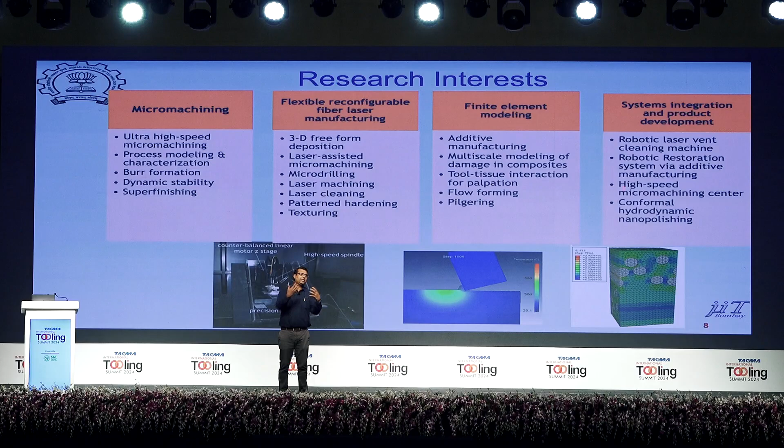So we work on typical industrial problems. We have made machines for CEAT, which have been deployed in their Halol plant. And also we are developing systems which will be deployed. These are special purpose machines. We do both ways. Some things we work on in the lab, and a lot of times we take the unmet needs of industry, work on them, develop a product in the process, and basically give it back to them.

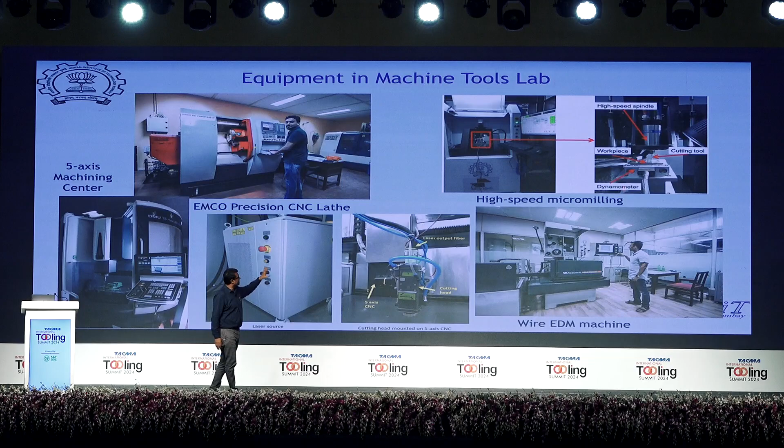And these are some snapshots of the lab. We have a 5-axis machine, we have a hard turning center, we have laser cutting machines, deep hole laser drilling machines, micro machining centers, electrical discharge machining centers. And we have one of the best characterization facilities in the country.

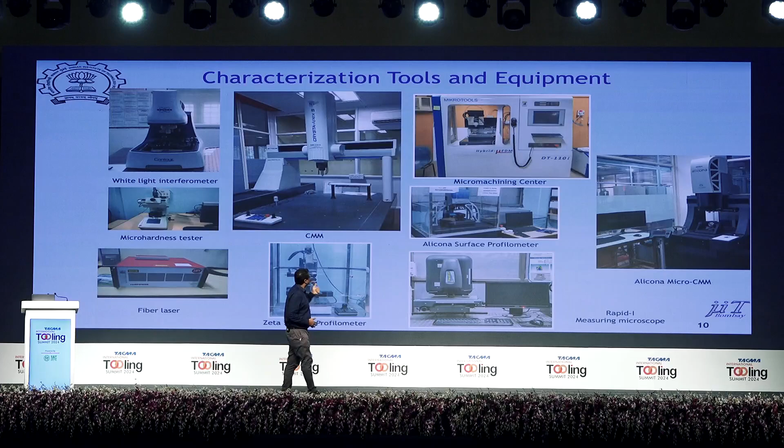We have a CMM that was donated by Mitutoyo, they gave it to us for free. And then we have systems which are automated, basically optical CMMs, surface measurement devices, and we have the best form and surface measurement facility in the country.

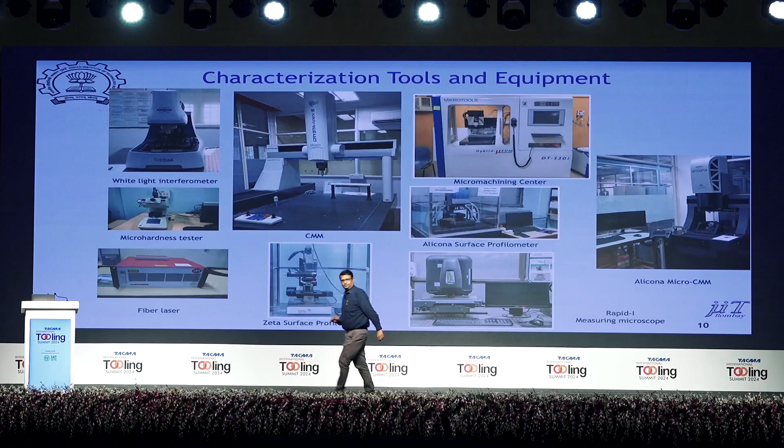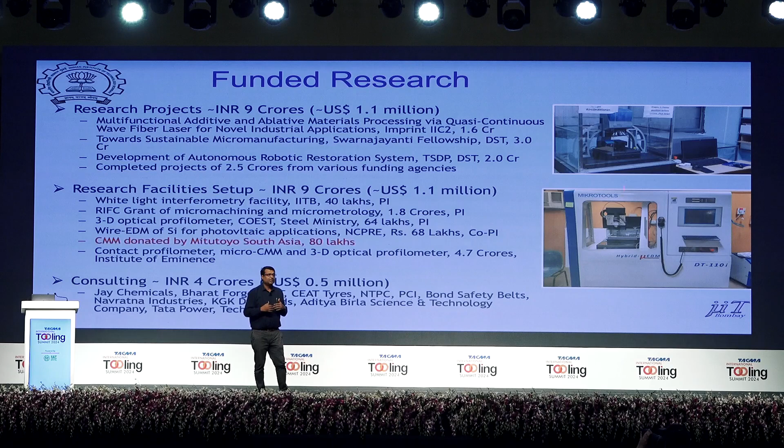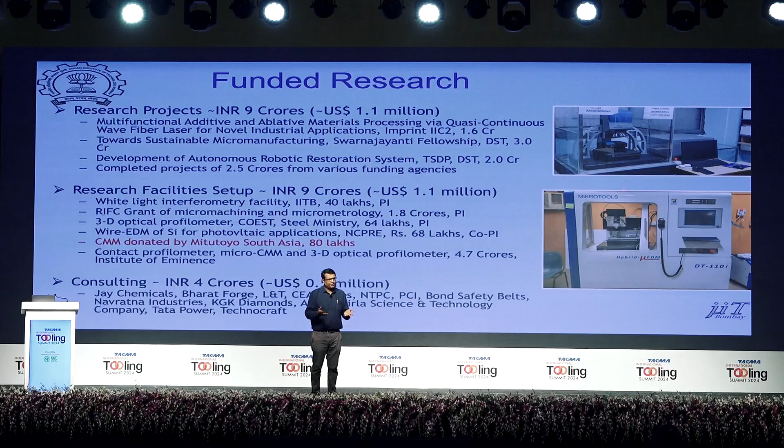And also, in my case, about 50% of my lab funding comes from industry. So we work with various companies. We have worked with L&T, we have worked with Bharat Forge very closely, Aditya Birla Science and Technology, a lot of MSMEs. Jay Chemicals is a company I'm working with, Technocraft. So a lot of these companies we work with, and basically we give them solutions. So a lot of the work we do is not just intellectual stimulation, but also hardcore technology development.

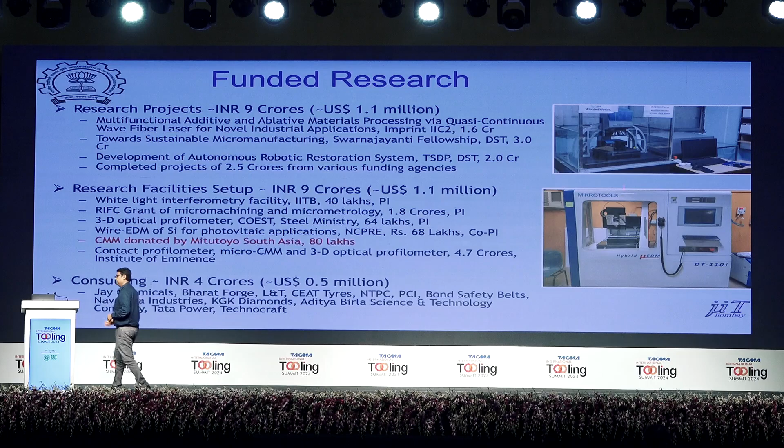So this is a long list, I'm not going to go through it, but then there were some issues. People were talking about polishing, right? Polishers are going away. So there are technology solutions for that.

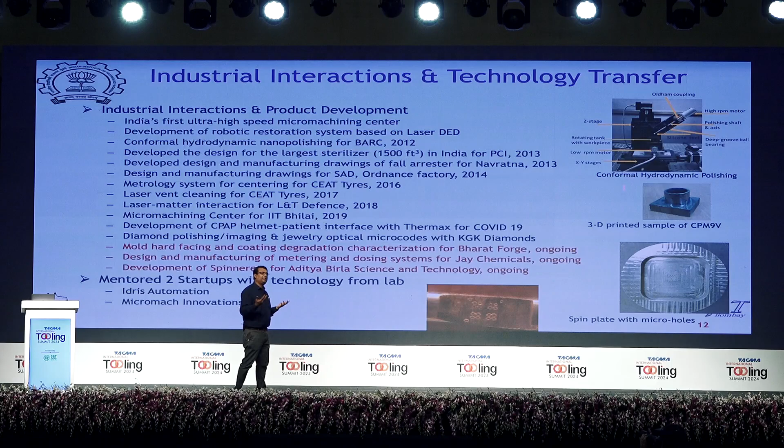So for the first thing, what I did was we developed a conformal hydrodynamic polishing process that was basically for BARC for a very strategic application. We made a machine to polish sapphire. We make a machine, and this can actually be done on a CNC, so you can do freeform polishing also. There are technologies called elastic emission machining, hydrodynamic nanopolishing, which can actually reduce your dependence on human polishers.

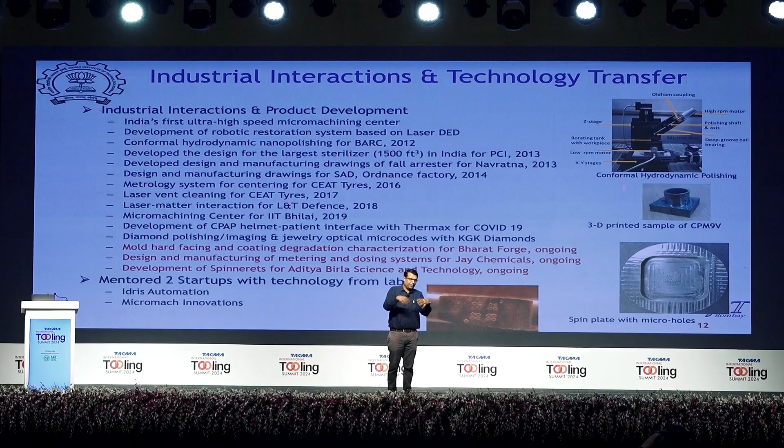So there are technology solutions for things which human beings aren't able to do. The other thing we did was, right now I'm working very closely with Bharat Forge, basically trying to look at their coating degradation or enhancement of coating, and also doing something like mold hard facing and repair.

And then we are doing something for spinneret development. These spinnerets are a whole bunch of holes, which are 200 micron holes, 3 mm deep. So that's the depth, that's the hole aspect ratio. We are basically creating machines, and developing the machines and the process for doing this.

In one spinneret, if you see in the bottom right, these are 20 holes. But an actual spinneret in industry would have 55,000 such holes. So you need to be able to create machines to make such precise holes in large numbers at an affordable price.

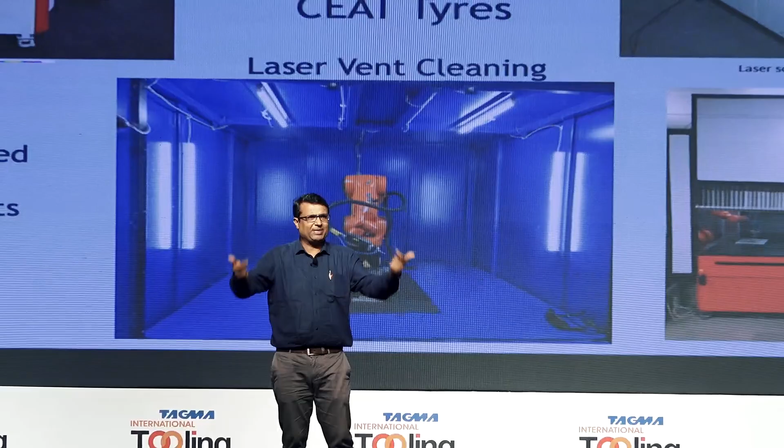And these are some of the machines which we have developed. We actually developed one machine for tire metrology. The problem was that when Ceat was building tires, their edges were not aligning, and they were not able to measure it accurately. So we developed a system with 2 cameras, did image processing, and gave it to their QA QC team's quality software, so it would say whether it meets the quality requirement or not. That complete system integration and building, we did for them.

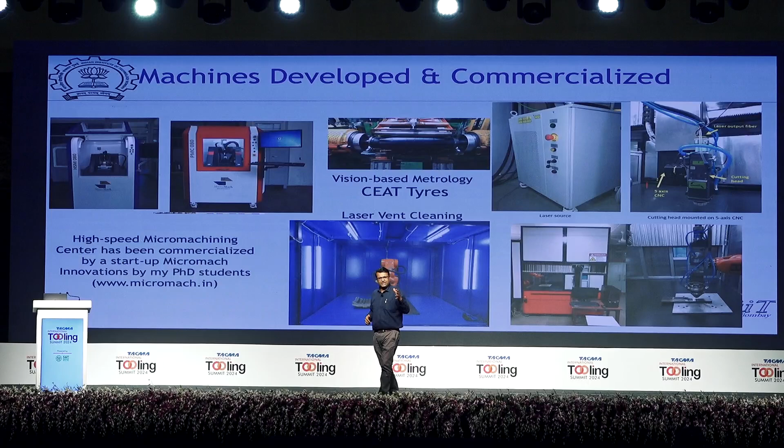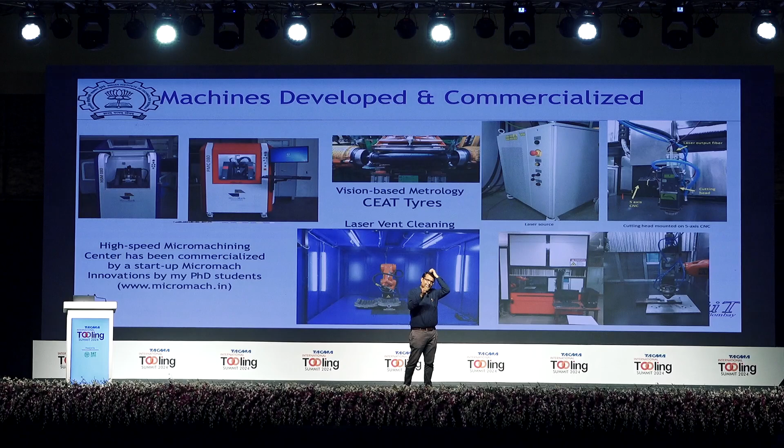Then the other thing we did was something called laser vent cleaning. All of us know these tires have vent spews, the hair-like structures you see on new tires, which come from the vent. When you mold the tire and do the curing operation, after a certain number of cycles the vent gets clogged. What they usually do is use a small drill, about 6 micron, to clean the holes. The problem is this drill can break, and then it can either clog the hole or go into the rubber of the tire. Both are very dangerous. If there's an imperfection or defect in the tire, it can explode.

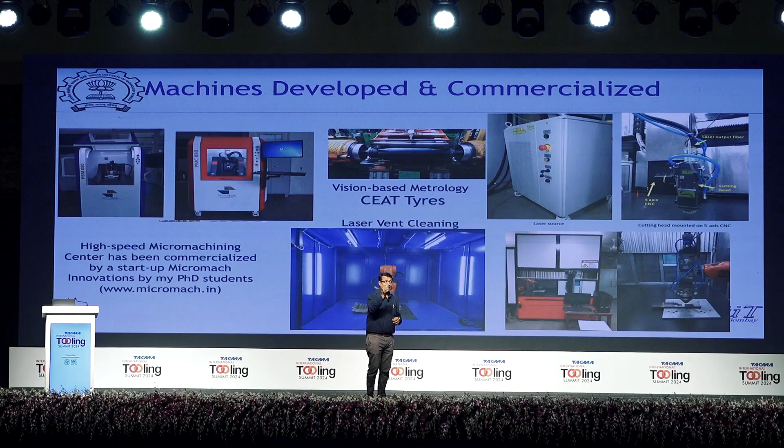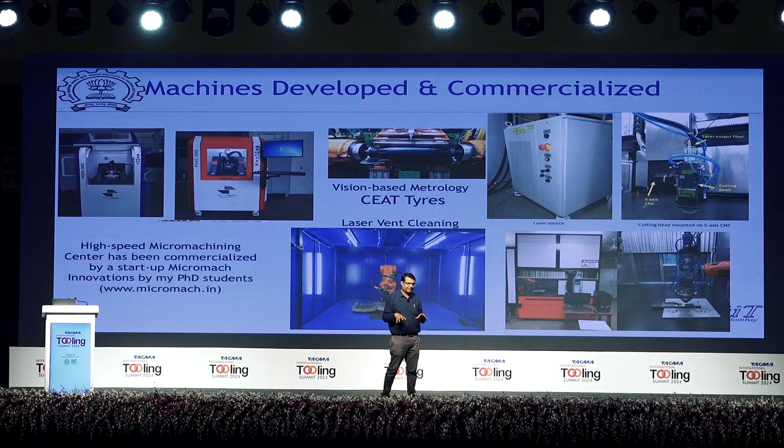These days these are tubeless tires, so they said they don't want any mechanical or manual drilling. So what we did was build a system with a vision system that finds where the hole is, fires a nanosecond pulse laser multiple times, and then blows away all the debris. Completely automated - we said we'd automate the whole process, you don't have to worry about it. The machine won't take any restroom breaks, so you can have a very precise process. We actually installed it - I went personally and installed this machine there.

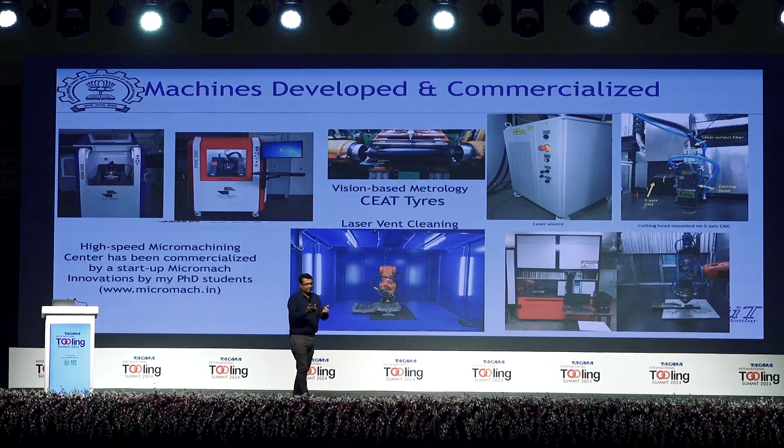And then we also built this micro machining center, which we talked about. For this we started a company. My PhD students have a company that markets the machine and the process, and we also provide both fabrication services and the machines to various people. We actually export some of these things as well - it's my students' company.

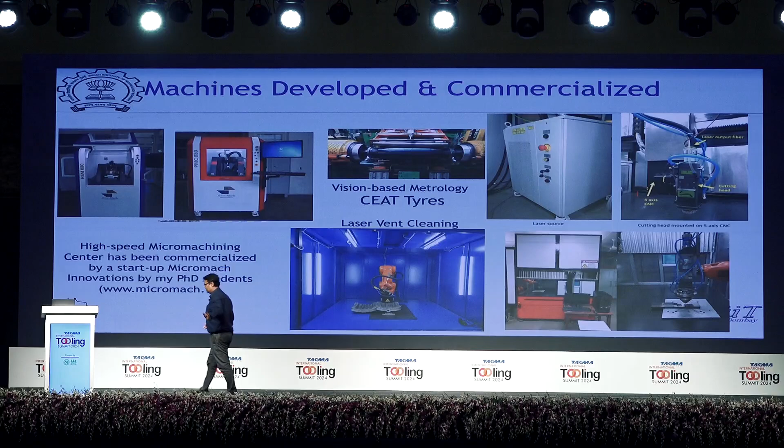Now, all this was just the introduction to what we do. Finally, what I'm talking about is a single project, an industry, academia, government collaborative development of this robotic restoration system which I'll talk about now.

So basically I'm preaching to the choir here, everybody knows this. Aerospace components, dies, molds, boiler tubes are all subjected to thermomechanical loading, and these are very high value items - I don't need to tell you that, you guys know much more than I do. For existing damage repair, when your mold is expensive and gets damaged, what do you do? You gouge out the material, fill it with a welding electrode, polish it, and say it's good as new. But the problem is it's a very ad hoc and imprecise way of repairing it, because you don't know what kind of residual stresses are coming. If the residual stresses are tensile, it will not last even 4 or 5 cycles. So if you understand it scientifically, the key challenge is how to do completely automated restoration.

So say if a defective die comes to me and I want to repair it, what would I do? I would need to create a system where it can scan the defect, deposit the material, finish it, and inspect it. Complete autonomous, no human intervention there.

So if I were to do that, there would be two challenges. The first challenge is creation of such a system. It would need a manipulation device, a deposition device, a scanning device to find the defects, and finally an inspection device. So one component is just developing the physical system.

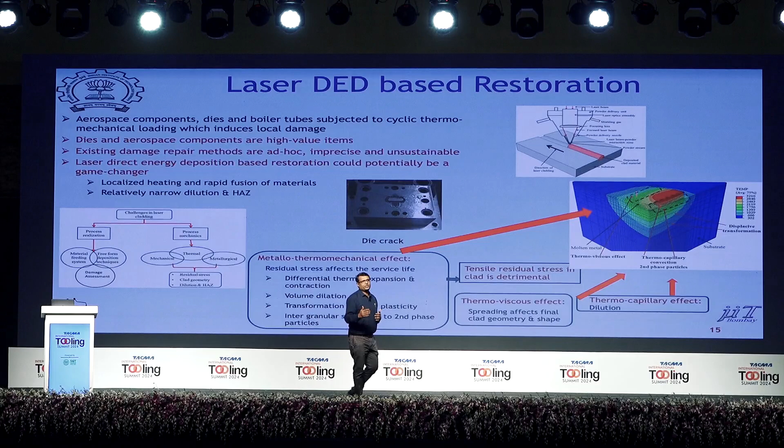So you need to understand the science. One important thing I always talk about is whatever technology you develop, if it's not science enabled, it will not be sustainable. That's what I talk about in all the forums, every place - technology has to be science enabled.

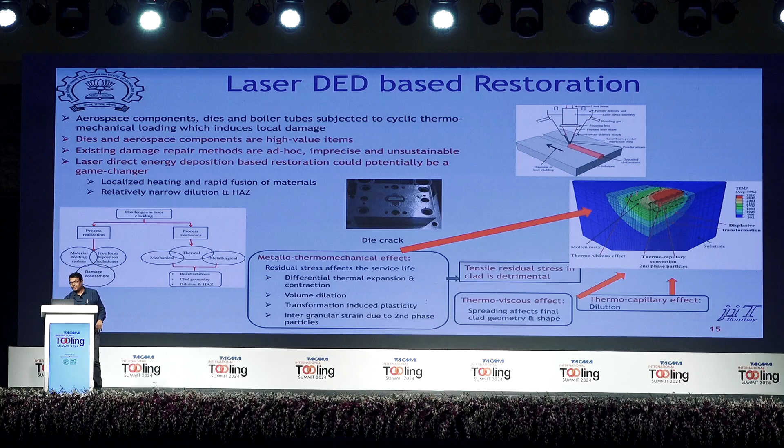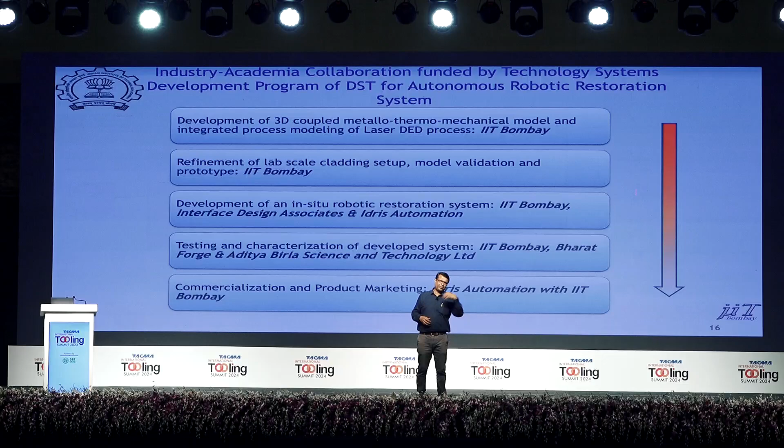So these are the work packages. What we did was first develop all the scientific understanding, which may not mean much to you, but I'll give you some gist of why this is important. Then we made a lab scale setup. Based on that, we went to the government and said give us money because we can show you a proof of concept, but a real system actually requires a lot of money. So then there's development of a complete system, testing and characterization, and finally commercialization and product marketing.

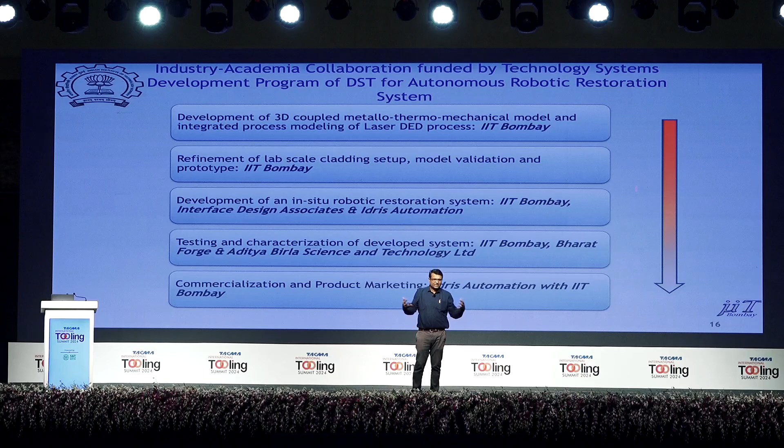So we had players for all these - some of them SMEs, some big players, but the idea was everybody would come together and develop a product.

What we do is capture the strains due to volume dilation, because when phase transformation takes place, if you cool it very fast, it goes from FCC to BCT, and there's physical growth in the volume, creating strains. If you don't account for that, you won't know what kind of residual stress will be there. And if your residual stress is tensile, a small crack will propagate. So if you understand that fully, you'll have much better quality of deposition. That's the moral of the story here.

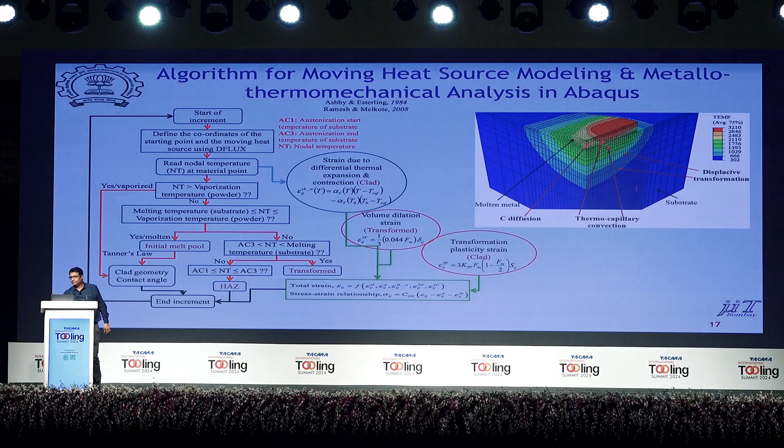So we developed this model and did the testing. We went to neutron diffraction, which is a really fancy technique, measured the bulk residual stresses, and then finally calibrated the model.

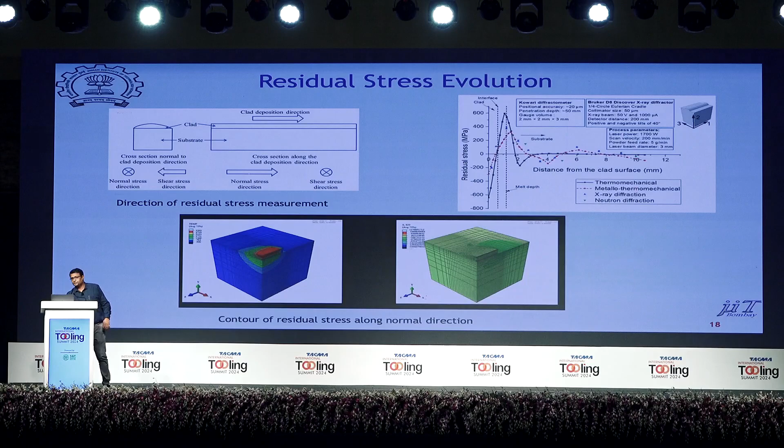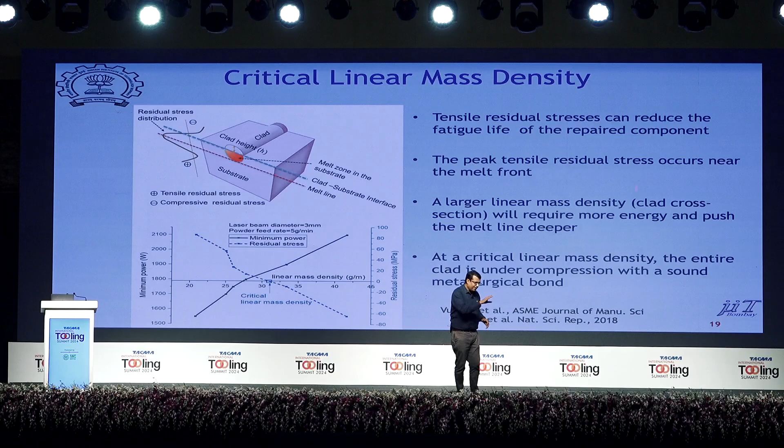With all this, our goal was to define something called critical linear mass density. So we can deposit certain material - it happens that the maximum tensile stress lies at the melt line. You can push the melt interface low, and because of force balance, the top layer will be compressive. So if your deposition is compressive, you don't have to do a secondary treatment - no heat treatment, no shock peening to have compressive stresses.

So this is what we got from this model - just by virtue of deposition, you'll have compressive stresses, so you don't have to do secondary treatment, no heat treatment, no shock peening required.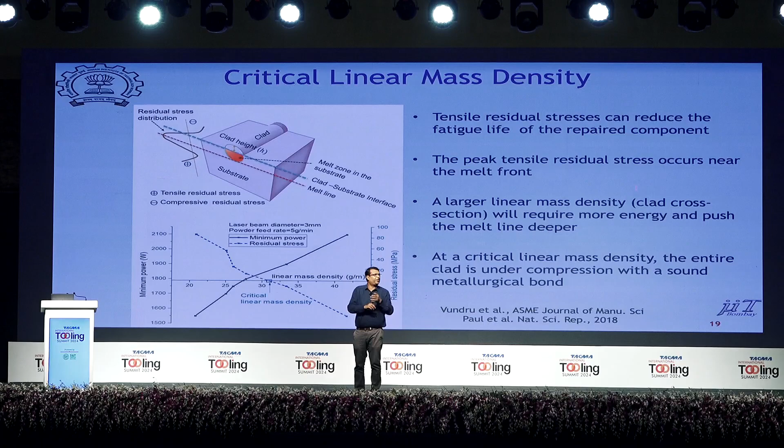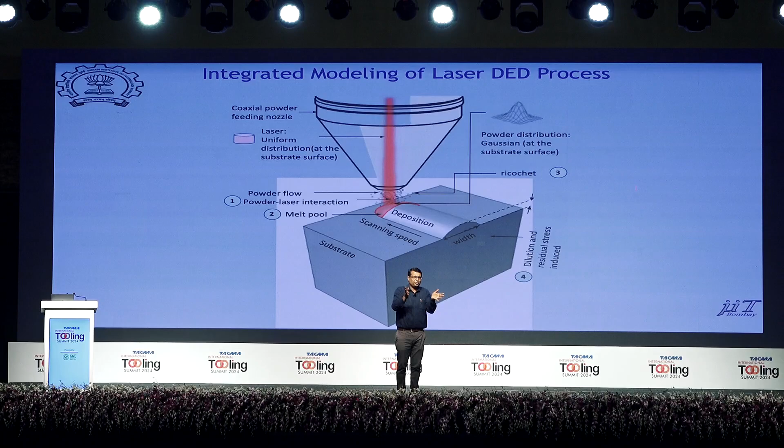Then we did an even more sophisticated model, which actually captures the laser particle interaction, the particle falling in, the melt pool evolution, and finally the deposition geometry evolution. I'm not going into the details, but finally the idea was I have a very sophisticated model, but what do I get out of it?

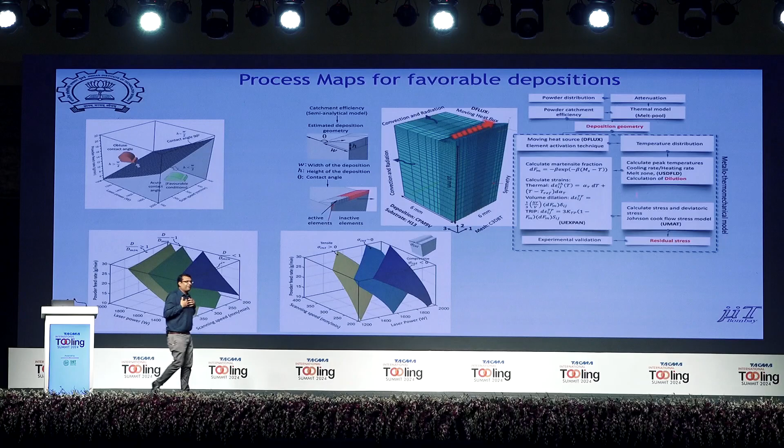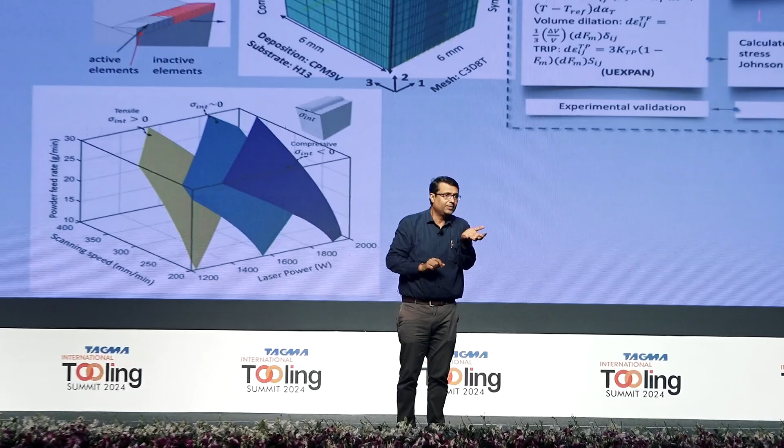There are three basic requirements when I'm doing additive manufacturing. The first one is, if my deposit is very high, my deposition angle will be obtuse, and between two layers I will have a gap. This will create porosity. So I want my deposition to always be acute.

The other thing is that my depositions should have adequate bonding, so the bonding between substrate and deposit should be complete. And in the third map, the entire deposition should be under compression. If there are tensile stresses, the crack can grow and I will not have good life.

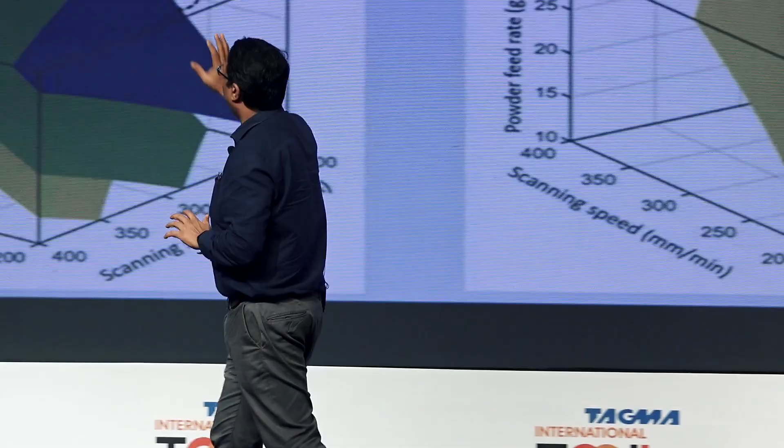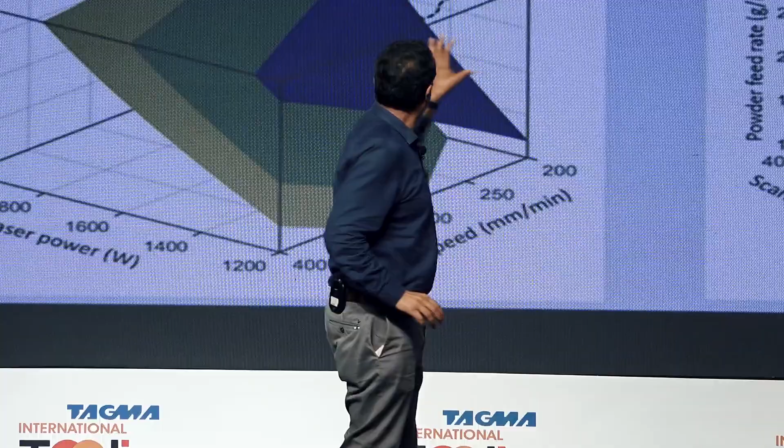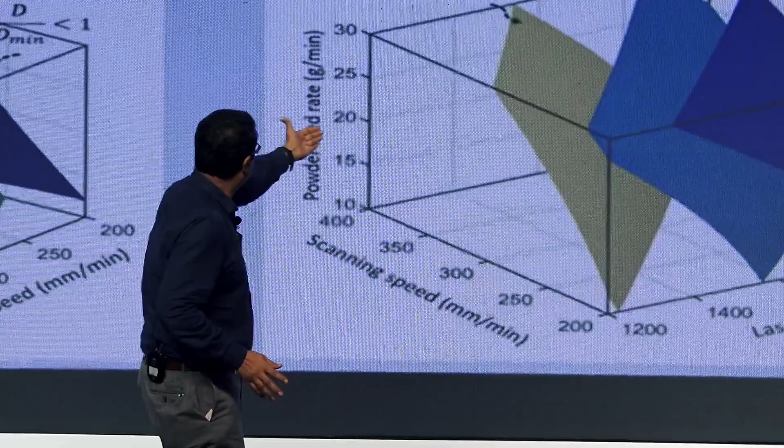So all these simulations, what we did was get process parameters where I will have good clad. In this laser power scan speed combination, I get favorable deposits. If D by D min is greater than 1, green and below are favorable deposits. And if you see blue and green on this side, those give favorable compressive stresses.

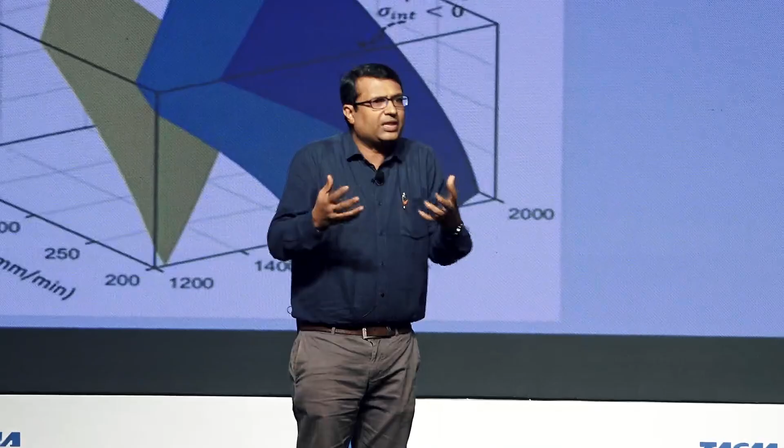So all these simulations are giving me process parameters to work with. This is not just intellectual stimulation, these are functional process parameters which I can use on a real machine.

So with all the science done, just to give a brief overview, now what we did first was develop a lab scale setup. We made a nozzle, a kind of stopgap powder delivery system, and built in some small features. We 3D printed a nozzle and devised the complete system with a 100-watt laser just to do the proof of concept.

Then once we had the proof of concept, we went ahead and started building a large-scale 5-axis or 6-axis robotic DED system for restoration. And then we did some characterization of the process once we built it.

Then we wanted to make it completely autonomous. Otherwise we are all talking about skill development, skill development - one way to address skill would be to enhance the technology. So you have enhanced technology where you can do automated scanning, automatic deposition, automatic inspection, and finally out comes your product.

So what I tried to do was very audacious. I said if I have a defective mold, I'll go ahead, scan it, deposit the material, finish the material, and finally inspect the material - with no human intervention.

That's my dream - we are far from there yet, but we have done two modules: freeform deposition and damage detection. The other two, finishing and inspection, are in the pipeline. And then I'll give you some examples from industry of what we did.

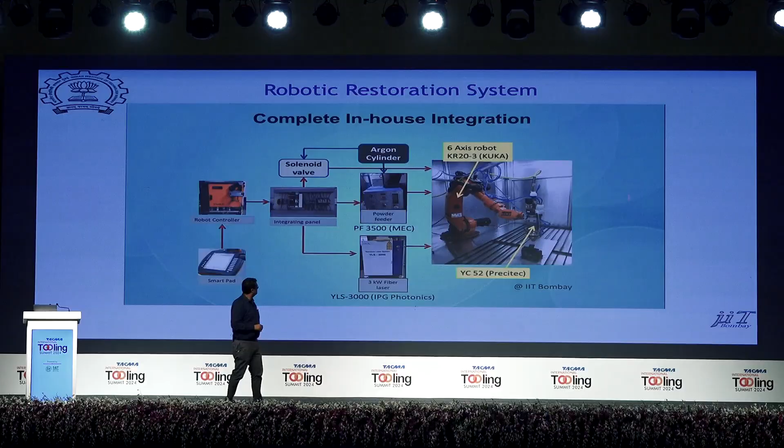Wire feeding is a new thing which we are still developing, but the powder feeder is fairly mature - we have done a lot of work with powder feeding systems. I'll just show you a small video of how it works. This is the system - the first generation system, mind you. The second generation system is much more sophisticated.

This is something we're doing, this hard facing, on H13 we are doing some CPM 9V, some crucible steel, very hard crucible steels for Bharat Forge.

So that was the first generation. Now we have made it look more professional.

There are two things. One side there is a robotic system with about 1.2 meter complete length, so with some gap I can handle easily 1.2 meter. And on the back also I can handle because it has a complete 360-degree capability.

I also have a 5-axis system of doing 1 by 1 meter, both built on a single platform. If you see on the left, this is how the machine looks, very compact, completely developed by us. All the system integration was done by us.

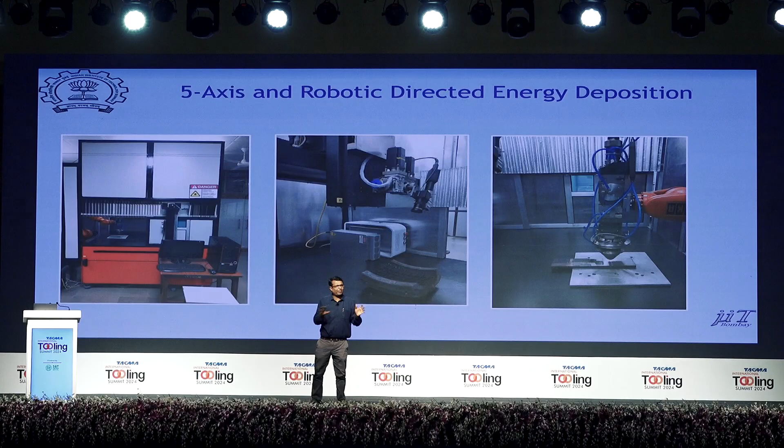By us, I mean my students. I can't take the credit, but they have done it.

Some of the things which we have done, you imagine this is what we have built. This material is crucible steel, the yield strength is 1.6 GPa. If you were to machine something like this, it's a nightmare.

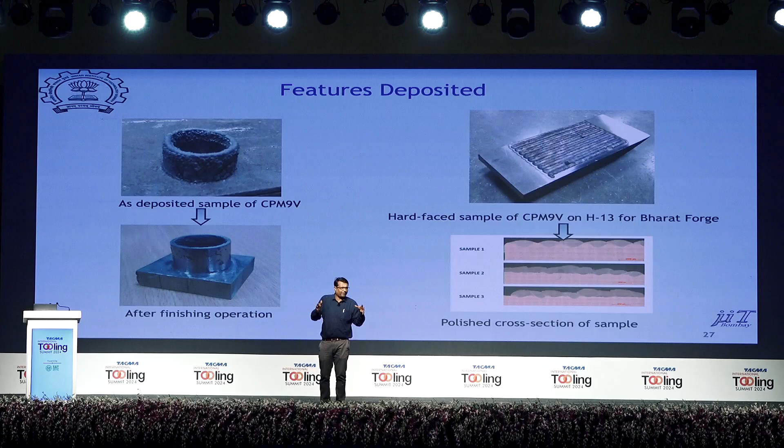But you can deposit it. So other than just repair, you also have this luxury of depositing super hard materials on top of your existing thing. So what we can do is not only repair your mold, we can make it better than what it was initially. That's what we propose.

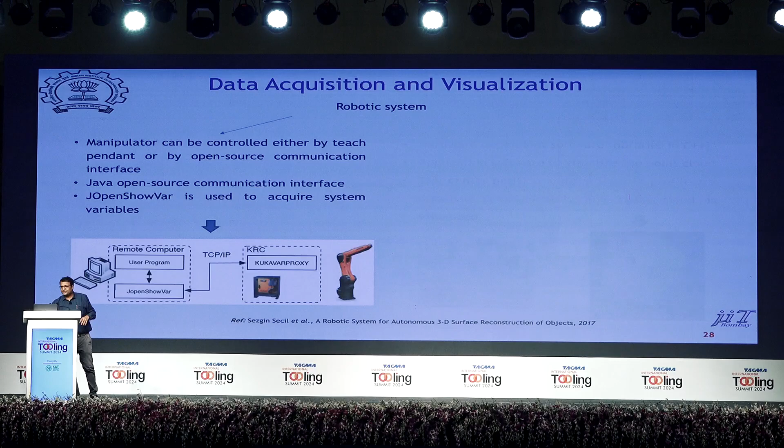So that was the deposition system. Now the problem is that I also need to be able to know where the defect is. So if my mold is damaged, I should be able to do the damage detection.

So what we do is we use a laser scanner and basically get the data from the laser scanner and the robotic encoder, fuse the information and create a 3D point cloud. From that data we also develop algorithms to do edge identification, and then identify what kind of geometry it is.

What we have been able to do is identify about 80 microns of defect, so that is our resolution. With this system, 80 micron defect size, diameter defect size, I can easily detect, which should be more than required for any functional damage on the mold.

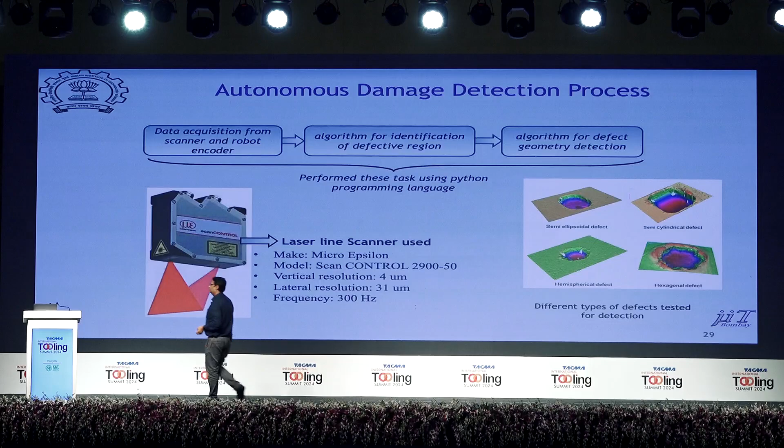I'll just show you a small video of the damage scanning system. This is just a simple thing, but we can do a lot more complex things, just to give you an idea.

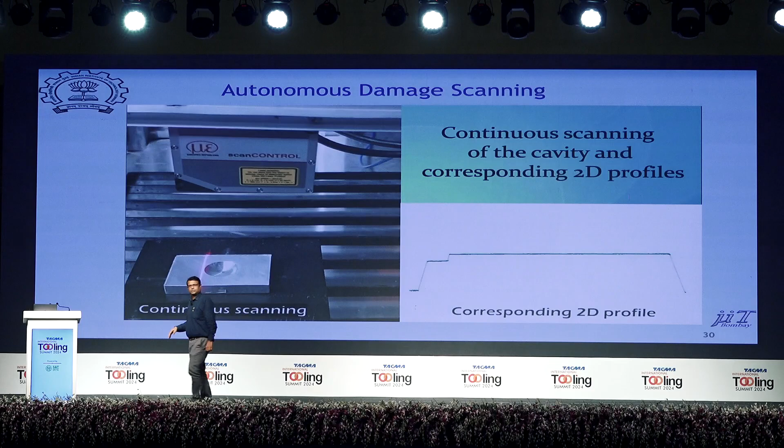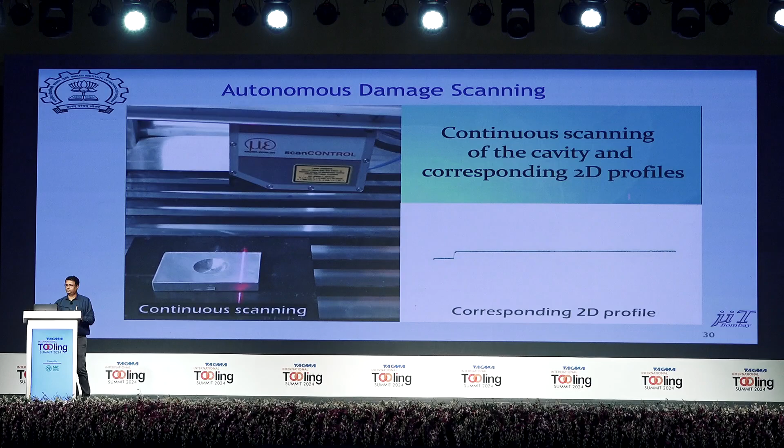So it basically gets the data and gives you a 3D map. It can also detect free-form shapes, so if you have not only flat but a shape with form, it can also detect defects on a form object.

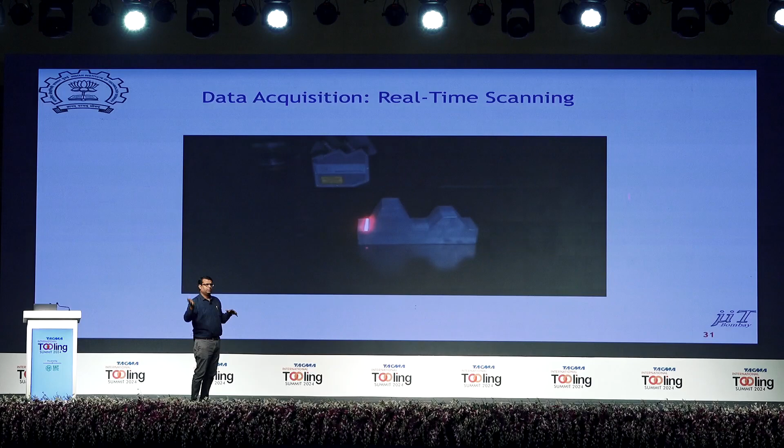So what I will do is, then we did some work with Bharat Forge. There was their punch, which we wanted to do hard facing on.

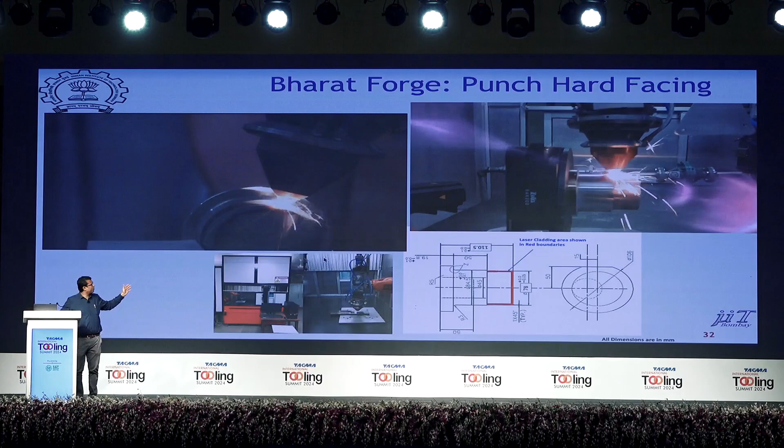This is a real punch from their shop. So I'll just stop here. We can do it either using a robot or a secondary axis. So this is my last slide.

I'll just summarize. The idea is that we create systems to do autonomous repair, and this can also be used for other things, for 3D printing, for surface modification. And the idea would be that we transfer technology to MSMEs. We also want to export this and create a startup ecosystem, working with industry to mature these technologies.

A lot of it is still very fresh, so it needs some time and some adoption to mature these technologies. So with this, I'd like to thank my students. They have done all the work, I take the credit. So thank you.

Sure, sure. Thank you once again, Mr. Ramesh Singh. I think we are all students of life to begin with, and we are always learning from different domains. And of course, this is a celebration of the tooling industry.